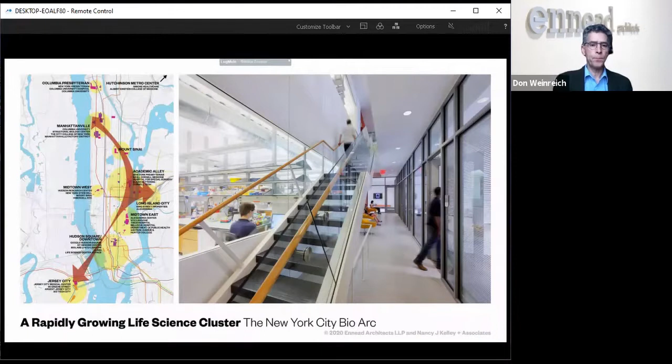Again, I don't want to repeat what Brooks was talking about, but understanding where the demands are coming from will certainly help developers decide where in the city the right locations might be to develop a property so that it can feed into these various pipelines. Again, Nancy is really the expert we refer to in understanding where the action is in these spheres.

In terms of how the demand gets met in the city, there are a couple of strategies we're currently involved in: adaptive reuse, certainly the fastest and maybe one of the lower risk ones; brand new ground-up development; special permits, which involve rezoning; and then looking at options beyond Manhattan.

On the next slide, I wanted to show you something we just brought online and are happy to make available to developers: a simple ten-page white paper to help in the assessment of a property in the city. Primarily this is focused on adaptive reuse of office space that might be adaptable to commercial life sciences, to help you get a quick understanding of whether a project might have legs. There's obviously a lot more work to do, but we go through a rapid assessment regimen. Some of this you can do yourself, some we can help you with, and you'll emerge better informed about what you might be able to do.

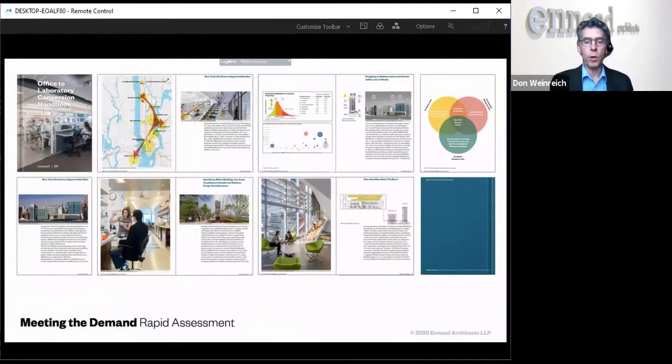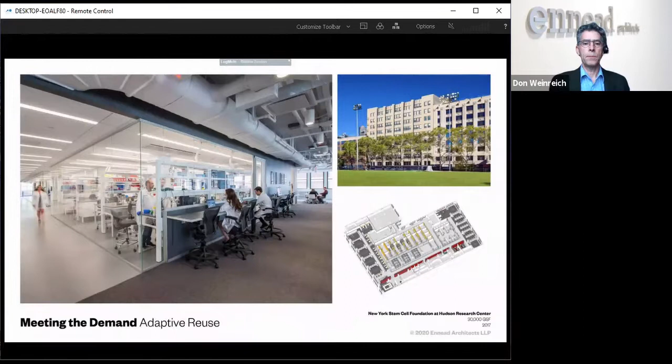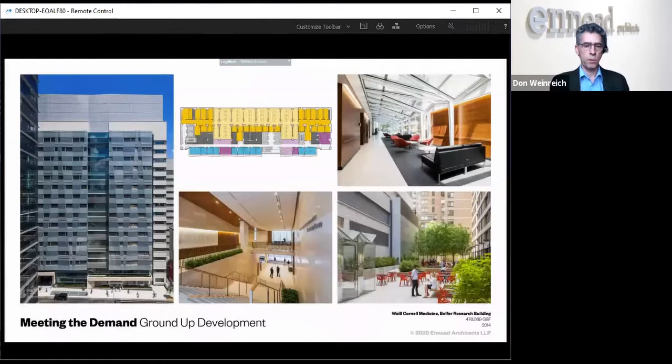Building from the ground up, this is on the east side for Weill Cornell, a high-rise lab, the Belfer building, and you can see the highly compact efficiency in that floor plate. It's a site only 100 feet deep but about 300 feet long, and it laid out beautifully for labs.

In the realm of special permits, which involve rezoning, we're currently doing that on behalf of the New York Blood Center on the east side next to St. Catherine's Park. One of the unique aspects of this rezoning was we were able to persuade city planning that a high FAR made sense if we could keep the height and bulk of the building down. So it's sort of a stout tower, which laid out beautifully again for labs with about a 200 by 200 foot floor plate.

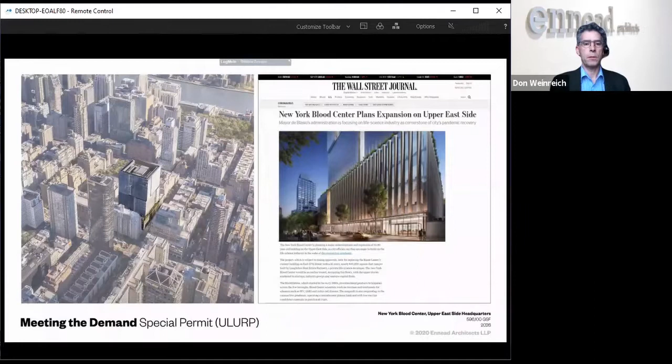That feeds into this kind of stacked mixed-use typology, similar to what Brooks was talking about, where we can mix different kinds of programs and stack them on top of each other to create a wonderfully dynamic high-rise condition. The map on the left shows the areas within the city where these types of projects can fit in under the current interpretations of the zoning rules.

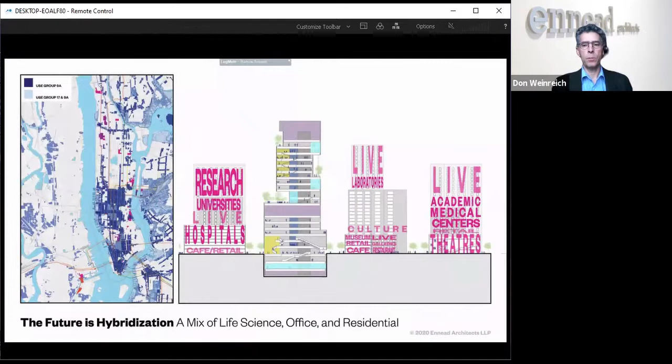So thank you, Bill, that's my intro. Thank you very much, Don, that was really tremendous—some real projects of scale there, very exciting stuff.

Matt, could you similarly, Matt Malone from Perkins and Will, give us a little intro about your firm and what you're working on? Absolutely, I'd be happy to, Bill. Thank you, yeah, so Perkins and Will is... hello, Matt Malone.

I'm a life science technology practice leader for Perkins and Will's New York studio. Perkins and Will is one of the larger firms, we've been around for about 85 years, we've got roughly 25 offices and 2,500 employees worldwide. But my focus is New York, my focus is science and technology.

So with that, I think we're talking a little bit about these adaptive reuse or renovation projects in New York City. One of them that's been mentioned is the InnoLabs project, which is a joint venture with King Street Properties and the Gural Group. This is about a 250,000 square foot building. Next slide, please—I'm going to go through these a little rapid.

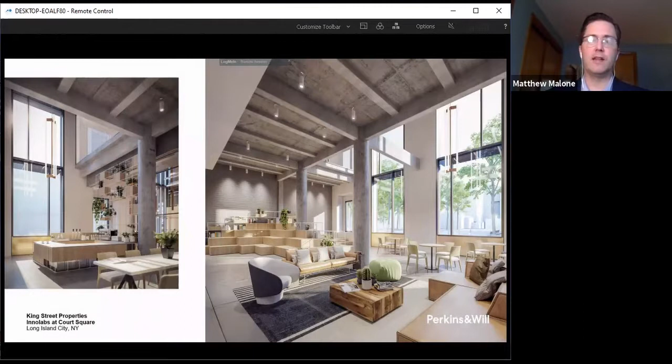The laboratories on this high elevation, looking back towards Manhattan, offer some really interesting views. You get the gritty urban context that Long Island City offers, and out the window you can see across the river to the healthcare corridor, directly over the bridge, over the Cornell Technion campus. It's a pretty interesting vantage point that I think only places like Long Island City can offer—you don't quite get those same views in Manhattan.

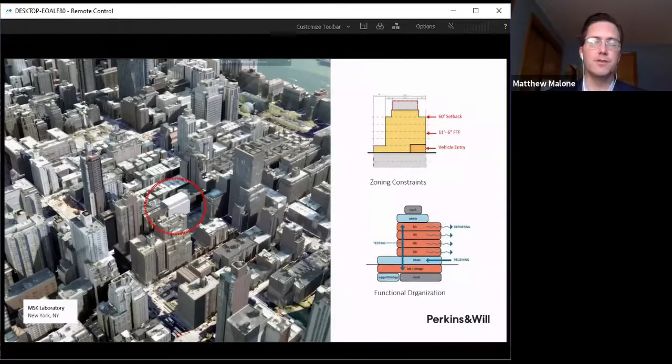As I mentioned, the idea of being contextual, the building itself wanted to maintain the datum lines that were within the residential neighborhood, which caused us to look closely at what we were able to do from an MEP integration perspective. The lower two floors of this building are predominantly mechanical spaces fed from an areaway in the back of the building, to feed air down.

This enabled us to focus the laboratories above and keep the elevation of this building. Despite what everyone says, I completely agree the idea of tall laboratories is something we have in New York that many other places don't. But this was an argument where there was an interest in making sure we were staying contextual to the environment the building was being placed in.

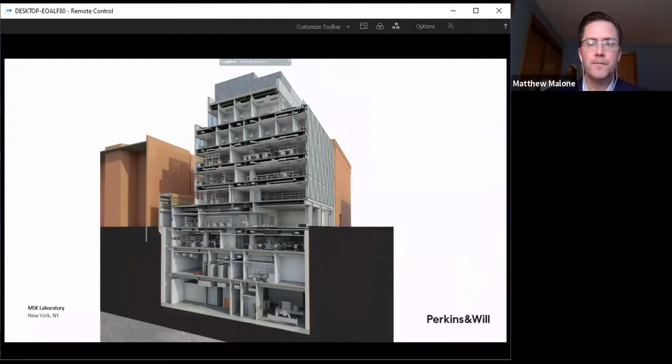So this is an idea of inside the laboratory. This is a diagnostic laboratory as opposed to an R&D laboratory, which goes to what Brooks was suggesting about the full spectrum of life sciences in a place like New York City.

This one is not a lab building at all, but I bring it up because it's crucial to some of the things we're talking about today. This is the North American headquarters for Unilever Corporation. This project is an existing building, or collection of buildings, in suburban New Jersey, and Unilever was interested in looking for other options.

Through the developer, we were able to convince them to stay in their location. If it made the most sense for them, we could make this building better feed their need. Their need being, they want to make sure they have a sense of place and a certain connection to the urbanity. The views from Englewood Cliffs to Manhattan are actually pretty spectacular, so they weren't interested in doing away with that.

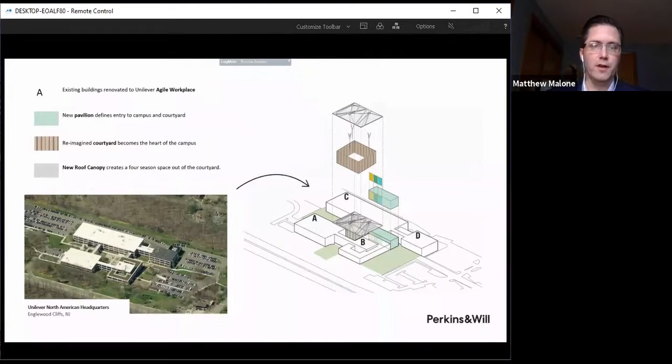In order to make this happen, we were trying to create these collecting spaces, repurposing the building specifically. An enormous amount of technology was integrated into it, which I think is going to become more important as we move forward in our post-COVID world.

So there you get the idea, and forgive the drama of the rendering, but you're looking at the George Washington Bridge with the sun peeking over the skyline there. This is the overall collection of the buildings as it was repositioned.

The interior space that was created was previously the unused space between the buildings, and there was an elevation change we needed to make. We created this environment that became a large gathering place for the entire Unilever staff. This is actually an outdoor space that has just been roofed over, and is a very moderately conditioned space. As a result, it's essentially a four-season room, for lack of a better description.

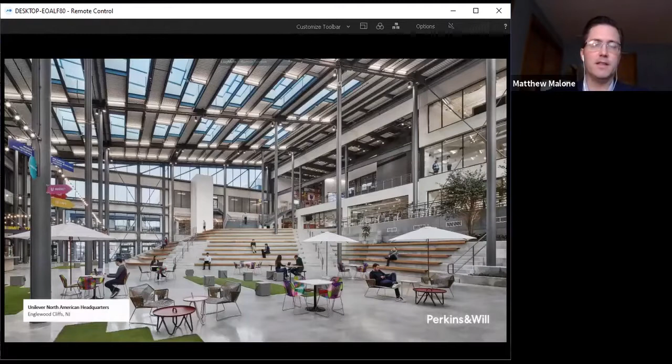This speaks a little to the technology integration I was referring to. This is a smart building that really took advantage of a lot of IoT components, which I think, as we're getting into an environment where we need to maintain things like social distancing, some of that live integrated information feedback enables. In the case of this building, it enabled Unilever to, in theory, shut down and reposition all of their staff during summer hours.

If they didn't need to keep a building online, they could tell all of their employees with flexible seating to move into another building. But in the case of, say, COVID, this enables them to spread themselves out a little more and understand exactly who is there and where they are, so they know they're maintaining their social distancing requirements.

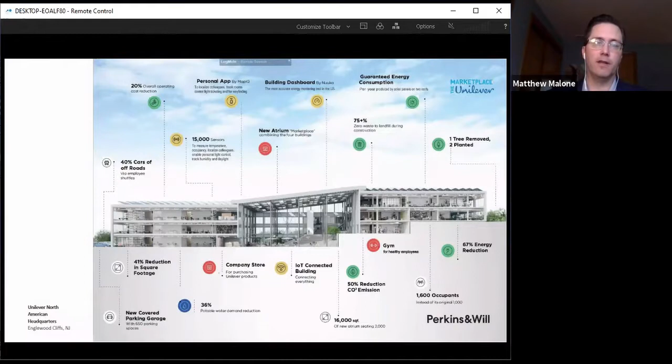This is some of the interior of that space. As you can see, it was an existing waffle slab building, so we wanted to make sure we were exposing that a little, giving it a bit more of an industrial life, and bringing a little more color and flavor to it.

And create these environments where people could, like I say, it was all a flexible seating environment—choose your seat for the day. Everything is interconnected and wireless.

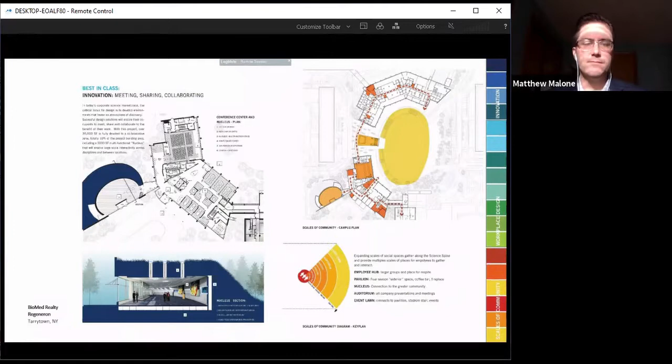On the interior, we've taken it as a pod approach. So all of these buildings, which look somewhat organic in their shape, have become, in reality, fairly regular and flexible from a planning design perspective, so that we could manipulate and change the design as necessary for the specific needs of the science.

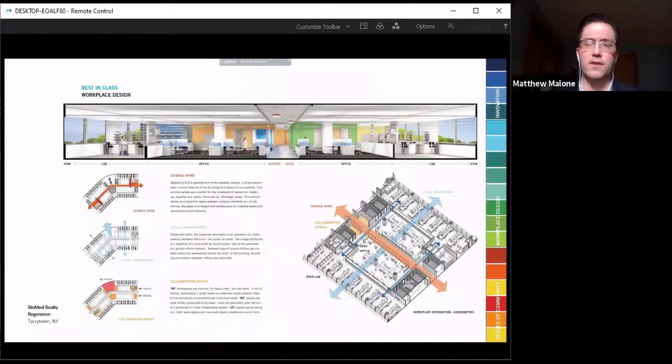And that's what I've got to offer you. I wanted to make sure we were keeping attention to the current things of the day that we're seeing. So I hope that was beneficial.

Thank you, Matt. That was very interesting. I was happy to see the 64th Street lab up there—I can remember how much rock we took out of that basement.

It's amazing, right? We have one question from the audience I wanted to get to before we go on. This is from Mark Rosenberg: considering the unique specifications of a life science tenant, how are you able to offer pre-builds? Were the labs at Hypercell included in the pre-build program?

The labs at Hypercell were built by Taconic before Hypercell was actually online. That's a little bit of a misconception because Hypercell did come on as we were building them, but ultimately they were designed and in construction previous to Hypercell.

We understand certain things about the market from our history. We're an 85-year-old company. We've been doing a lot of commercial science work in Boston, Cambridge in particular, but other locales as well as the West Coast. So we've taken a lot of that benchmarking information and tried to be honest with you, tried to hit the highest possible common denominator. In other words, get us 75, 80% of the way there, and then allow Hypercell to come in and manipulate the space ever so slightly because of the maximized flexibility we designed, in order to meet their more specific needs. And thankfully, that one has proven incredibly successful in that regard.

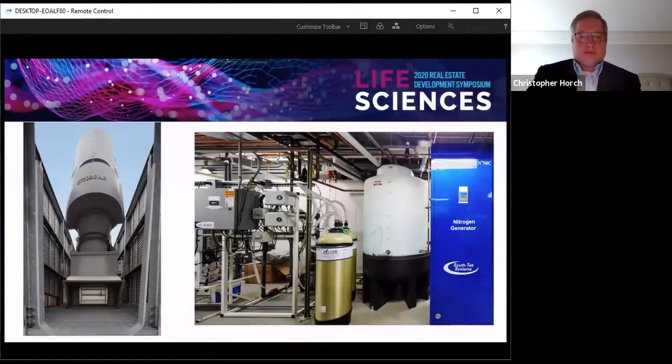The laboratory of mechanical systems, air handling units, and chiller plants can be provided in mechanical spaces, basements, roof areas, or occupied floors. By going to a modular design, not only is it able to fit within a 12-foot floor-to-floor height, but it offers redundancy, reliability, and flexibility for adding or deleting modules as tenants occupy buildings.

Having the building laboratory ready, but divorcing the laboratory from the office portion, the building can be flexible to ever changing market, and the capital expenses can be kept to a minimum until tenants are ready to sign leases. So as you can see, the air handling units are creatively designed and piped, and your modular chiller plant on the right is in a nice row configuration, again all fitting in a 12-foot floor-to-floor. Next slide, please.

I will close by saying that the laboratories of the 21st century have the look and feel of a tech company corporate office with collaboration spaces and open laboratory design, instead of the laboratories thought of with closed off walls, individual benches, and minimal daylight. Nancy had highlighted those very early this morning. The 1900s labs have the feel of dark fiefdoms, but the laboratories of today are bright, airy, collaborative, and purpose built for that science to really take off. So these spaces can mimic out-of-the-ground construction and purpose-built laboratories within an existing building.

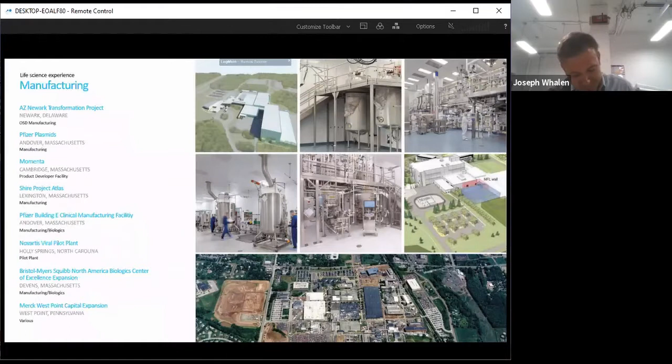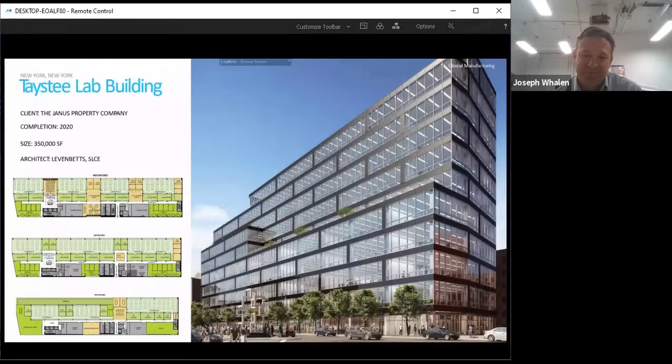Amazing square footage in that building. It's enormous. It's deceiving, though. Yeah. Are they going to be able to split it up into?

They're going to split it up, right, into smaller. So you're going to have a mixture of larger sort of scale tenants and then the smaller sort of startups. Yeah, the lower floors, it's a pretty big floor plate. You can get two 15,000 square foot labs, which is a nice size for a startup. And as you go up the building, it skinnies up a little bit, but it's a very nice layout, lots of light. It's positioned well.

It's in a really good location right next to Columbia. And I think they're going to do really well with Malthouse across the street and the Mink Building. And SLCE is your architect on there? Yeah, we have SLCE and BR+A. They've been great. BR+A is a mainstay in New York and Boston. Very successful. Good, excellent. Thank you very much.